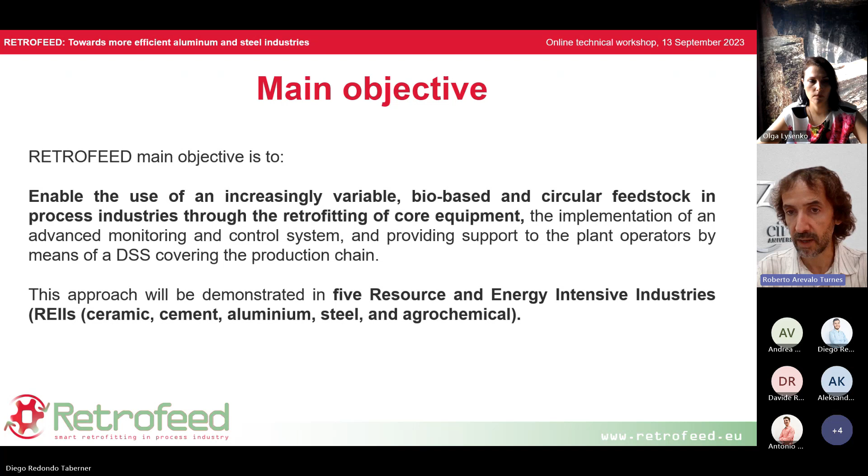The core equipment has been modeled by a digital twin in all cases, while the other processes, upwards and downwards, have been modeled by a variety of techniques, including machine learning.

These models, the digital twins and the machine learning models, are incorporated in the DSS, which also includes other tools to calculate, for example, KRIs, KPIs, production scheduling, prices forecasting, and other features. Together with the novel sensors, these tools will allow us to improve the control of the processes at hand.

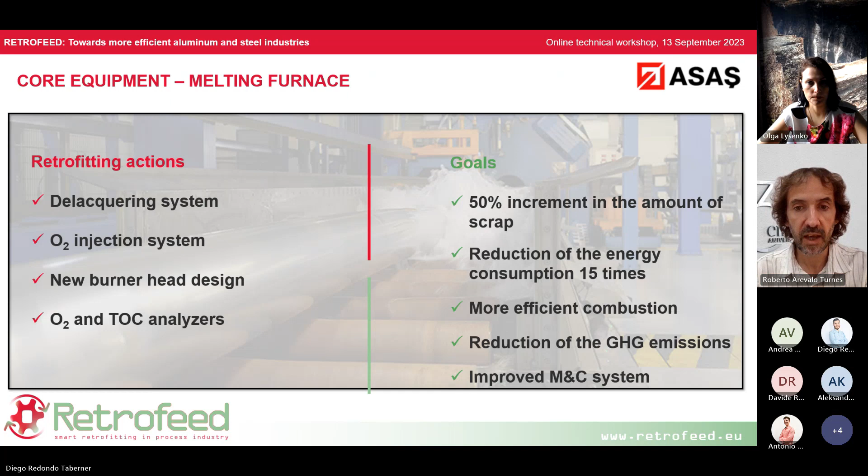Next one, please. In Feno, the retrofitting has been completed. The development of the models has also been completed. And now the tests with biochar are underway.

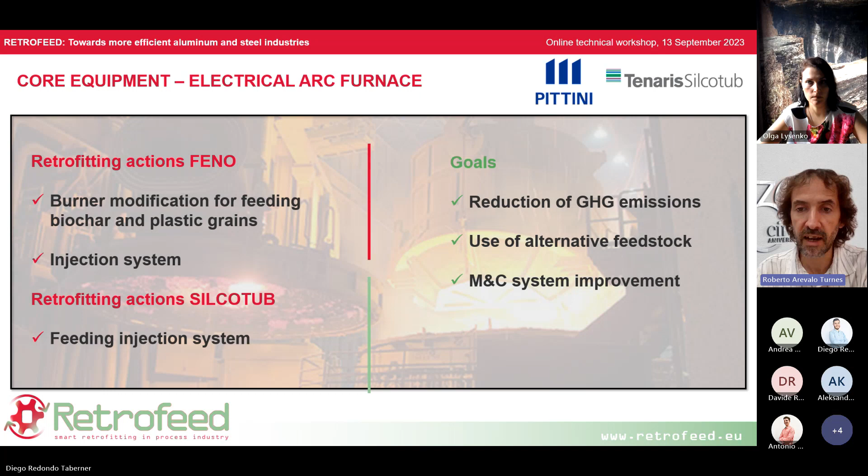Next one, please. In the case of Torrecid, this demo has also completed the retrofitting operations. The models have also been completed, and we already have preliminary results that indicate that we are achieving our goals in all the items, in energy and material saving, in optimization of fuel consumption thanks to the preheating of the air, and also in the reduction of material waste.

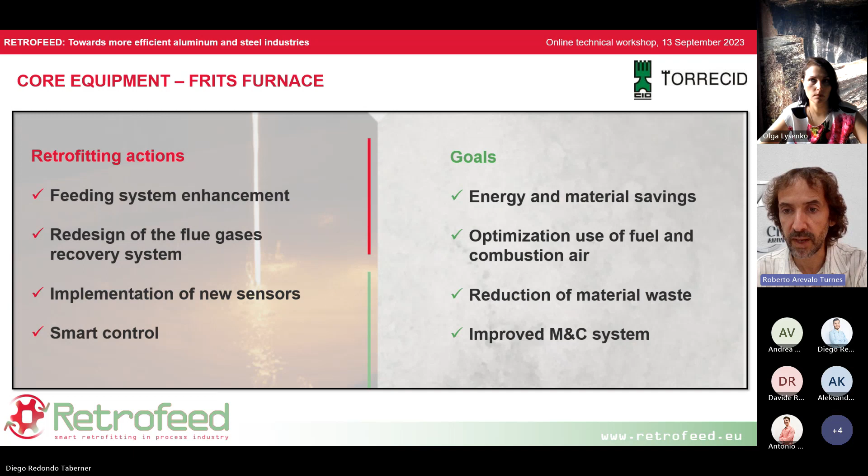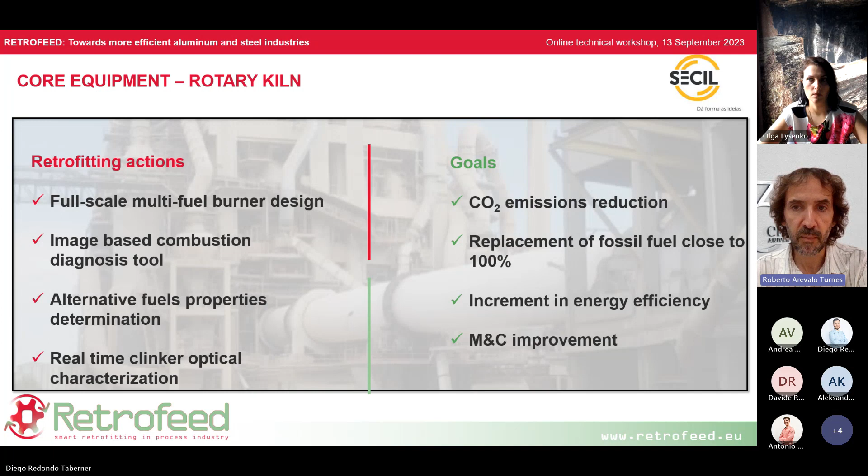In Secil, in the cement sector, retrofitting is currently underway. It will be completed this month, so soon the tests will start. We have completed the development of all the models and novel sensors, so this demo will soon also be completed. And finally, in the agrochemical sector in Fertiberia, a new reactor is going to be installed in the next months.

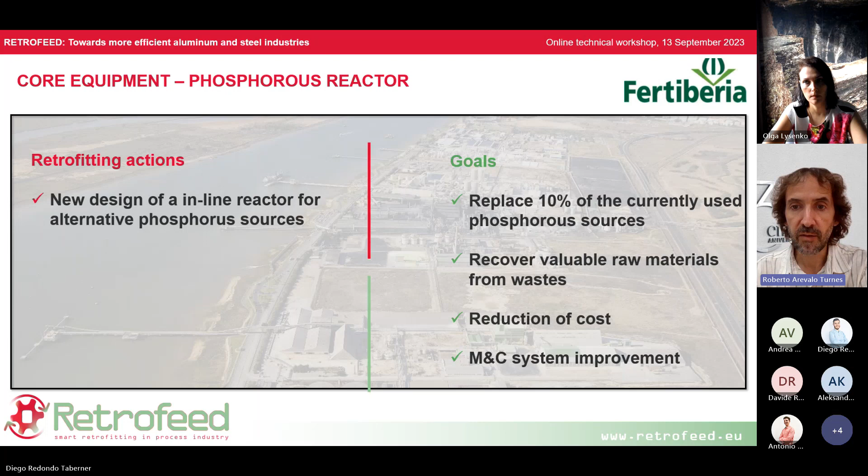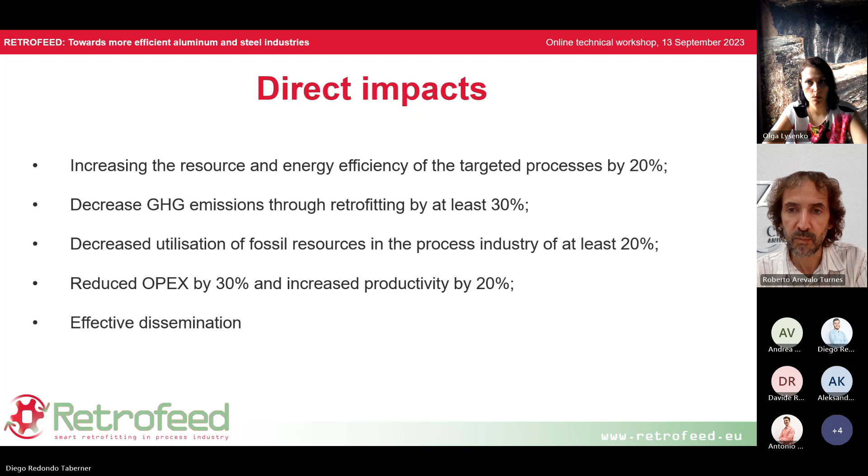And finally, a brief overview of our goals. As you can see, we have very ambitious goals in terms of energy efficiency, reduction of GHG emissions and use of fossil fuels, increase of productivity, and reduced OPEX. In the preliminary cases where we already have some results, we are glad to say we are achieving these goals. We hope the same is true for the demos completing retrofitting in the next months.

So thank you, and now I leave the presentation to the technical presentation.

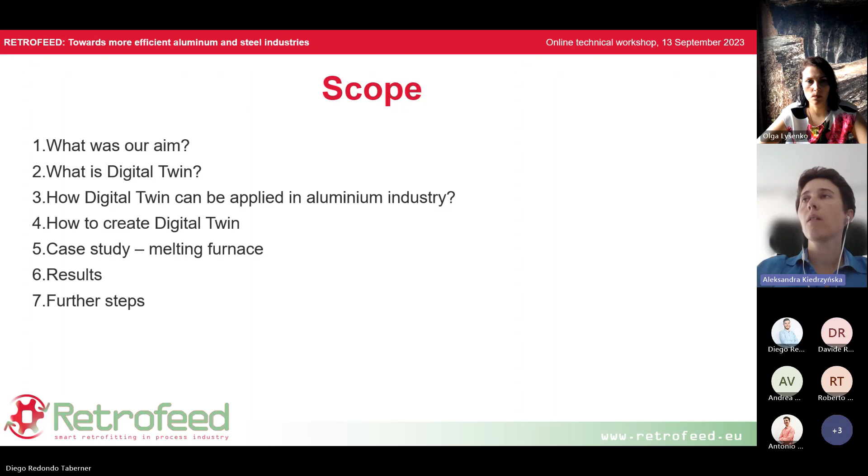The aim of this study is to develop a digital twin of core process equipment in the aluminium sector, characterize the behavior of this equipment, analyze possible retrofitting scenarios and modification of process conditions, and provide improved knowledge of the process.

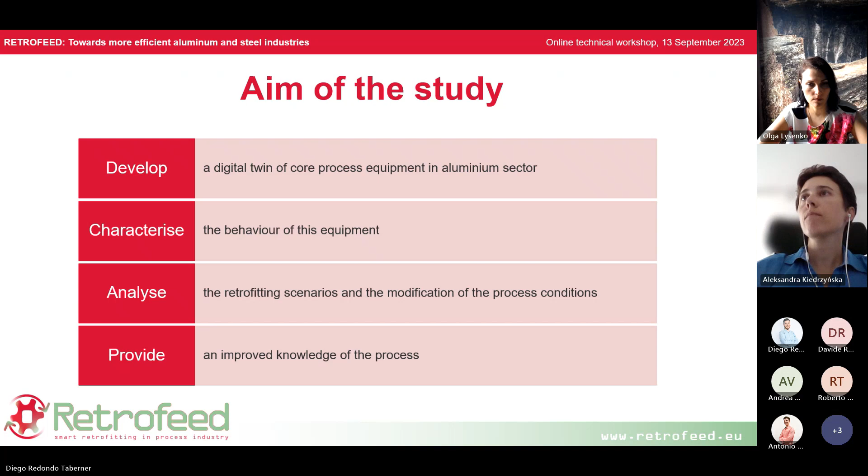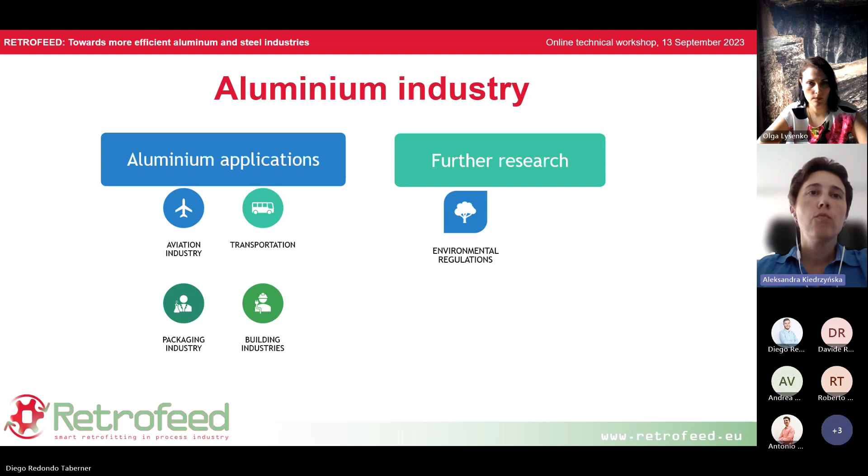The aluminium industry still faces two main environmental problems, which are energy consumption and pollutant emission. Of course, aluminium is widely used in fields such as aviation industry, transportation, packaging industry, and building industries. The global demand for aluminium is estimated to increase by 3 times by the year 2050.

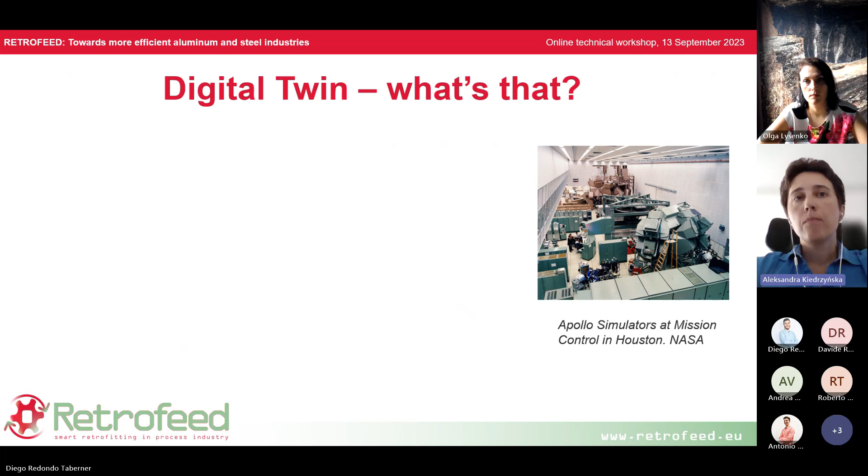The process of aluminium melting has been investigated for a long time. Different fuels, burners, and modifications were simulated and tested. However, further research is still needed to fulfill the requirements of environmental regulations, reduce non-renewable fuel consumption and pollutant emission, and improve energy efficiency. Aluminium melting emits almost 7 tons of CO2 per ton of product, which is the most energy-consuming part of aluminium processing.

Digital twin has its roots in aerospace engineering. The idea comes from the Apollo program, as it was the first place where the digital twin idea was put into practice. However, it was not called digital twin then.

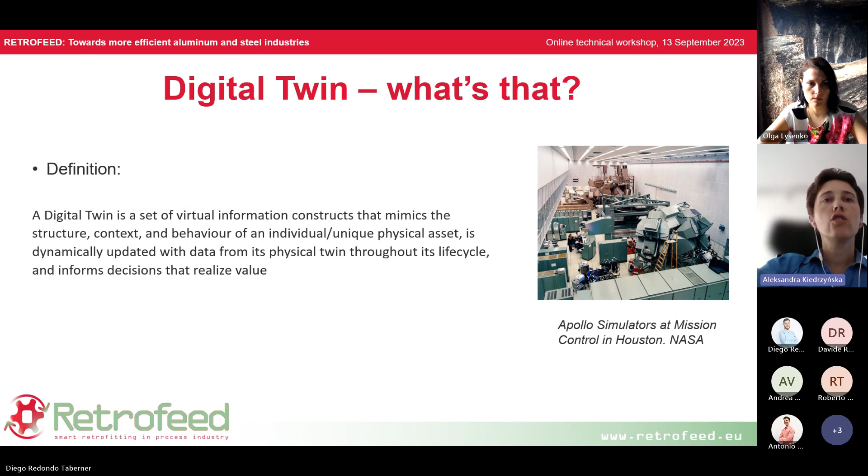According to the American Institute of Aeronautics and Astronautics, a digital twin is a set of virtual information constructs that mimic the structure, context, and behavior of the individual unique physical asset, is dynamically updated with data from the physical twin through its life cycle, and informs decisions that realize the value.

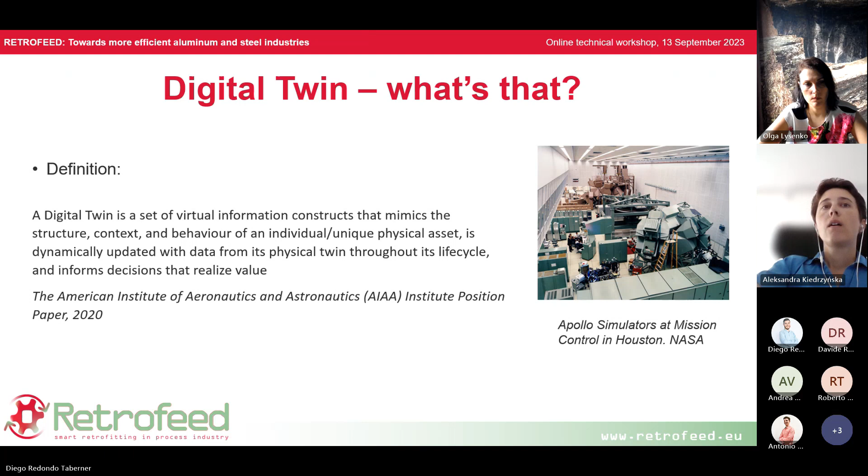Possible applications of digital twin are anticipating the response of the system, predicting system failure, and developing new technologies such as virtual prototyping. The aims in digital twin development of the aluminium melting furnace are better process understanding, prediction of furnace behavior at variable conditions, and optimizing furnace performance.

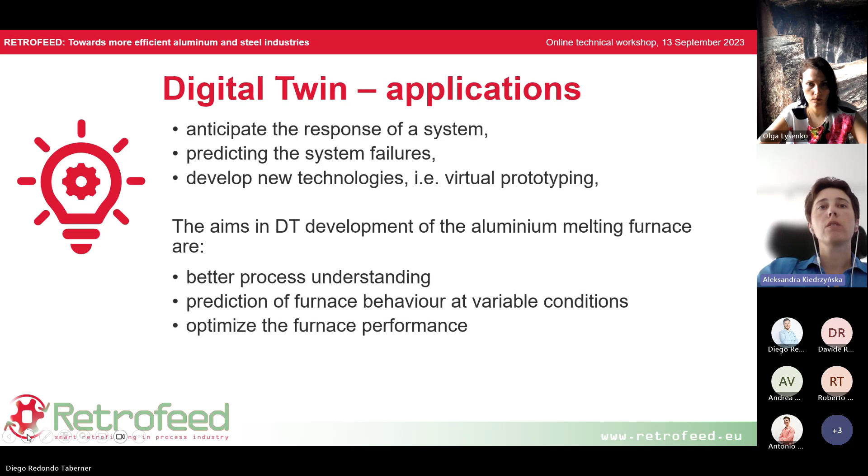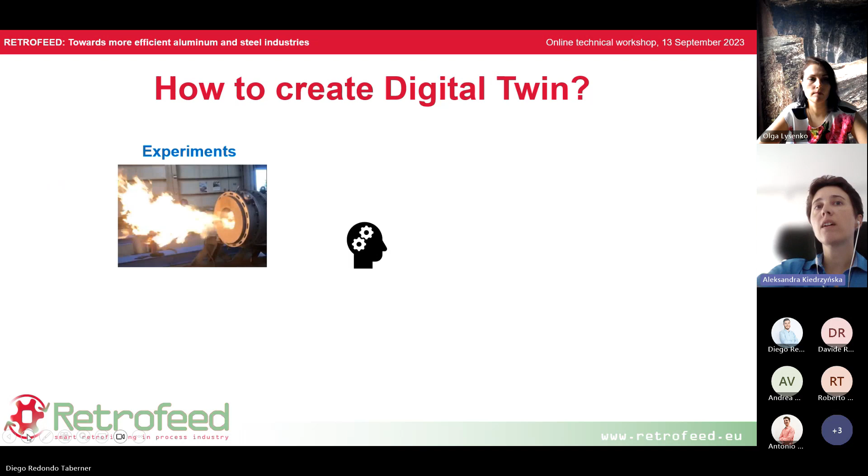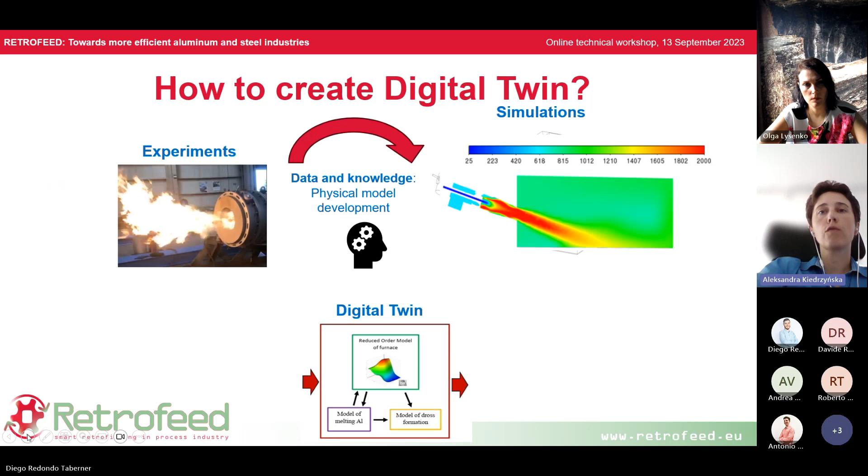To understand how the digital twin can be developed, it is necessary to understand the mathematical and computational foundation for digital twin, and what are the connections between experiments, simulations, and digital twin. From an existing object, we should get data which can be used for physical model development.

Then, based on simulation, we can extract features for machine learning and reduced order models. The digital twin must be validated based on experimental results, and limitations must be defined. The problem is when we are doing virtual prototyping and testing new solutions.

In our case, it was a new burner. Another problem can be when there is a lack of sensors which can be used for validation. In such cases, the digital twin can be based only on simulation and engineering experience of a similar system. This was the situation in our case.

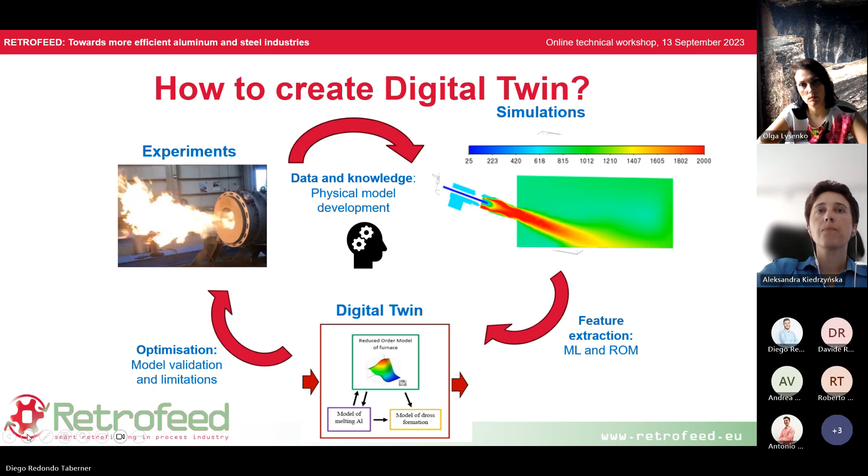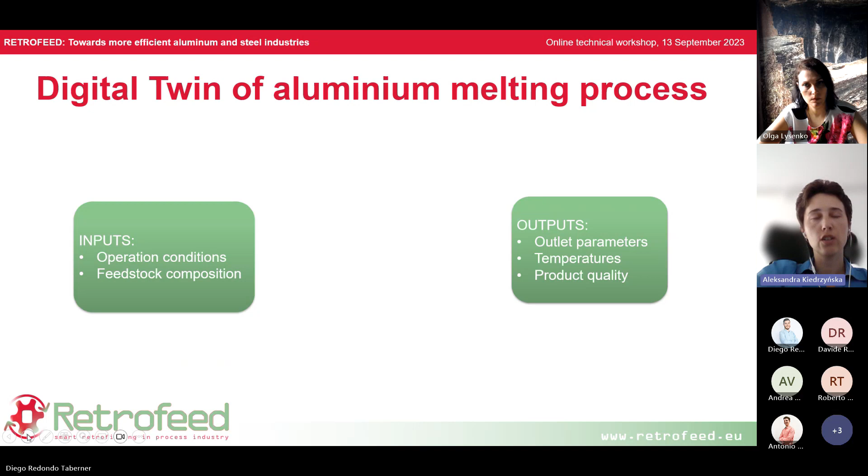In case of aluminium melting process, the inputs to digital twin are operating conditions such as power of fuel, temperature of air, air to fuel ratio, and oxygen flow, and parameters concerning the composition of feedstock loading to the furnace, such as total mass of aluminium sources, ratio of scraps, and ratio of contamination to scraps.

The outputs are the parameters such as temperature, species concentration, and emissions. Temperatures of refractory surface and product.

In our case, digital twin consists of 3 submodels: reduced order model of furnace, model of aluminium melting, and model of dross formation. Why did we have to split our digital twin into submodels?

The furnace is working in continuous mode, however, with changing operational parameters. But the melting process is a batch process. The feedstock is loaded to furnace and then discharged after melting. The full simulation of the whole process would be too computationally demanding. Now I'll shortly say a few words about those submodels.

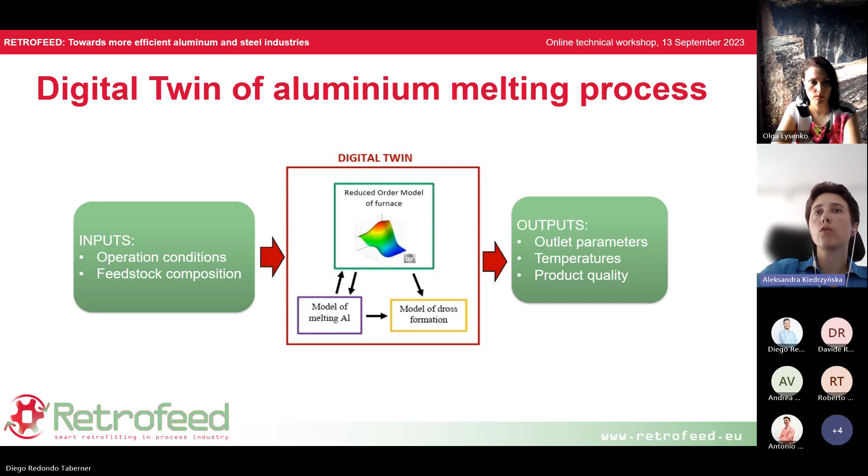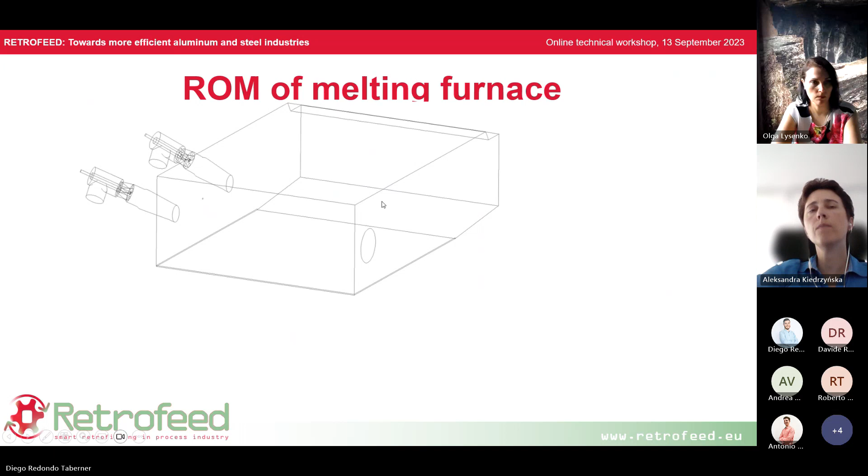To analyze the process of the aluminium melting furnace, the model was created of this aluminium furnace with 3 different burner heads. All the dimensions of the furnace and boundary conditions were in agreement with the real furnace.

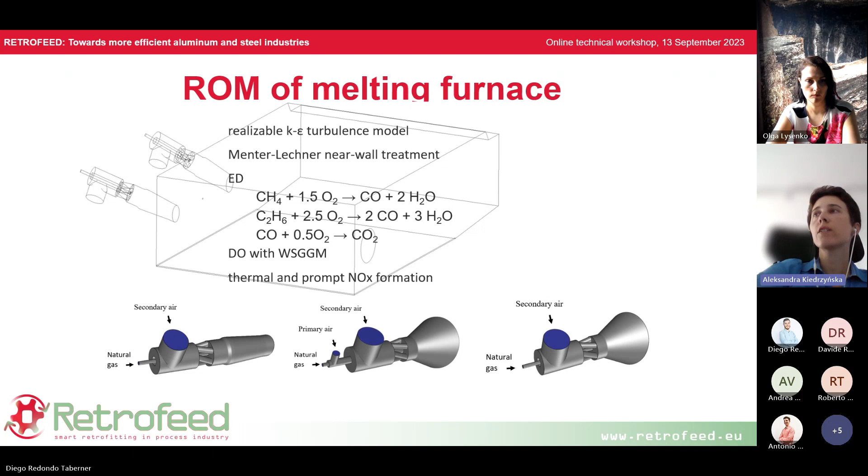The model was simulated, including detailed turbulent combustion with heat and mass transfer, including eddy dissipation, turbulent model, and radiative heat transfer, and 3 main reactions of combustion: methane, ethane, and CO were included.

The simulations were made in ANSYS Fluent software. Based on a series of simulations for different conditions with predefined range, the surface of response was created using ANSYS Twin Builder software. The ROM was created using genetic aggregation algorithm. The goodness of fit is presented next.

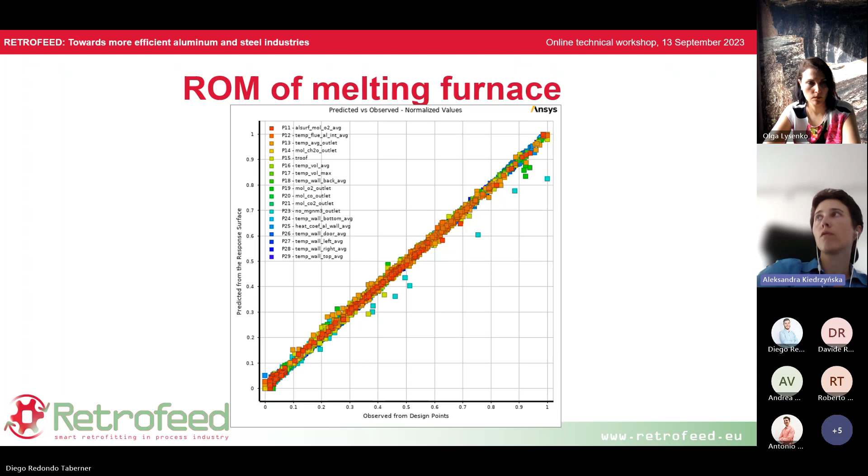It is presented as correlation of normalized values of observed and predicted output values.

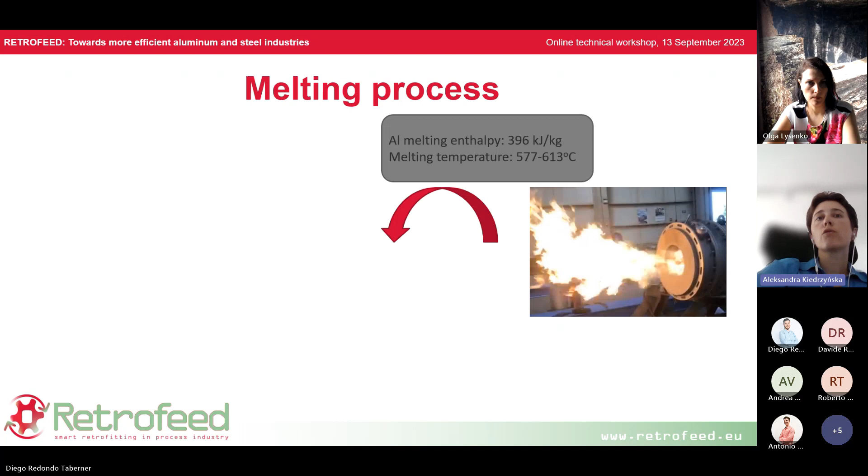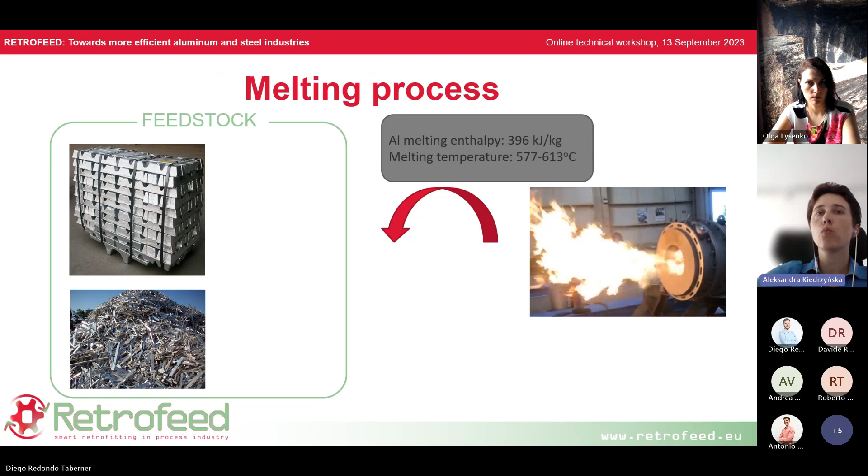Now a few words about the melting process. How the combustion process influences the melting process and vice versa. The combustion process, of course, needs to deliver heat necessary for aluminium melting. For one batch about 20 tons, we need about 20 gigajoules of energy. But how can the melting process influence the combustion process apart from being a negative heat source inside the furnace?

Aluminium feedstock consists of ingots and scraps. Ingots are quite clean aluminium, but scraps are recycled and can contain up to 5% contamination, such as paints or oil. When they are inserted into the furnace, those contaminations are intensively released as volatile organic compounds and are combusted in the furnace. This also increases dross formation.

The dross is a byproduct which decreases the product quality and efficiency. Melting process of aluminium involves the phase change of the aluminium. It was simulated using the enthalpy method, and a set of ordinary differential equations were included, also including the release of volatile organic compounds.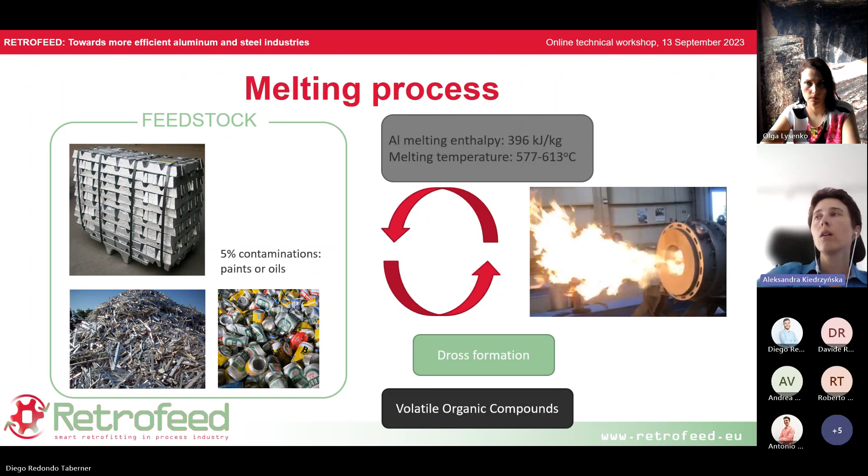Due to lack of any model of dross formation that can be applied for assessment of dross amount, it was necessary to carry out some experiments and develop a model based on that. We did these experiments in our laboratory scale macro TGA for different parameters of temperature, oxygen and scrap fraction.

Based on that, we obtained some empirical correlation which allows at least to estimate the quality of the product. The comparison between measured and calculated values is presented in the figure below.

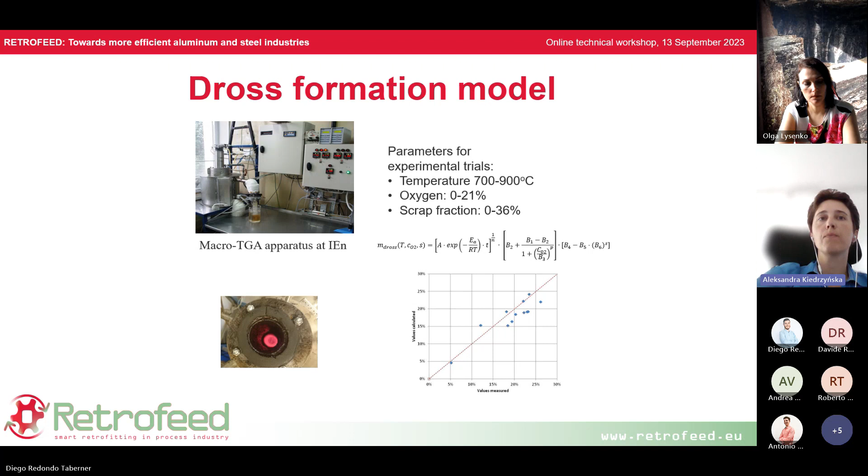This dross model was also implemented in Modelica and integrated into the digital twin.

However, the digital twin was validated only based on CFD results, because the installation of the new sensors at the furnace was finished with some delays. Such parameters as fuel flows are measured constantly, but for example, only total amount of air is known during a batch.

The results of some operational parameters must be assumed or estimated based on others. Here we can see the comparison between the measured value, the red line, and simulated, the green line. As we can see, the discrepancies are visible.

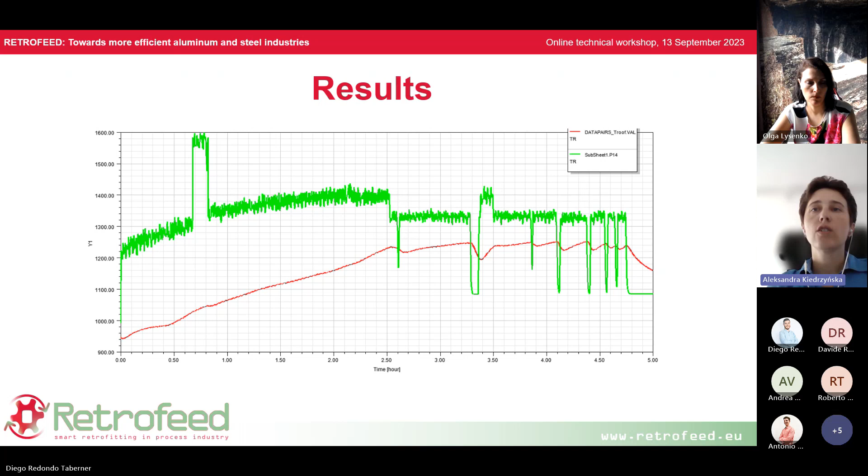However, the roof sensor, which is simulated here, is shielded and indicates temperature changes with a considerable time lag. We can also see here the step change of temperature caused by sudden release of volatile organic compounds and their combustion with added oxygen.

One application of the digital twin of the furnace was comparison of two burner heads. One was the primary burner head, and the second was a burner head designed by STEC. The results from the digital twin show what the advantages of the new design are.

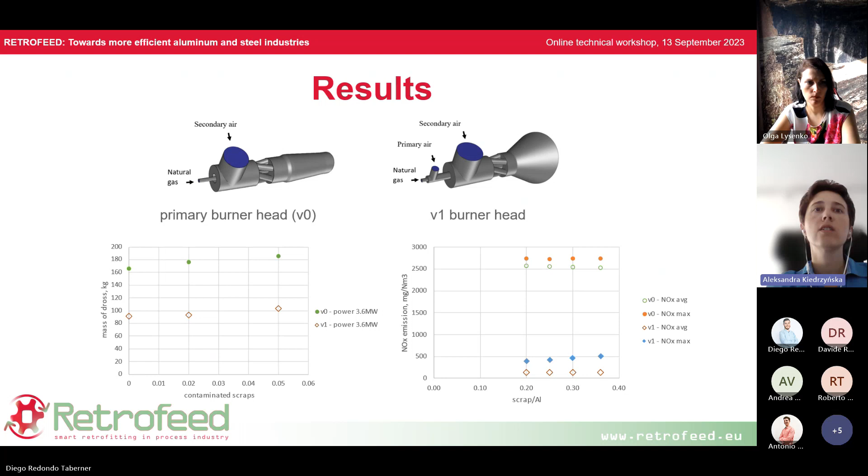For example, there is less dross formation, which results in better product quality.

Another advantage is the much lower NOx emission, even with higher scrap content. That new burner was already installed in the ASAS furnace, and preliminary results show less natural gas consumption and lower NOx emission than the previous burner, which is in good agreement with our results.

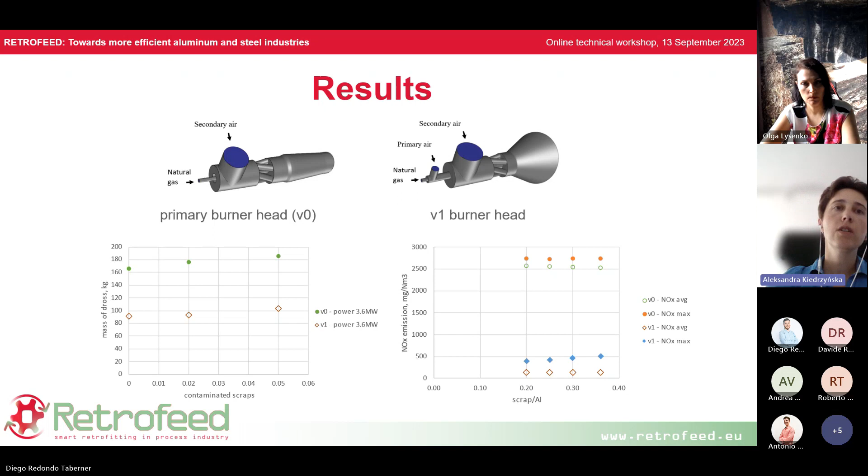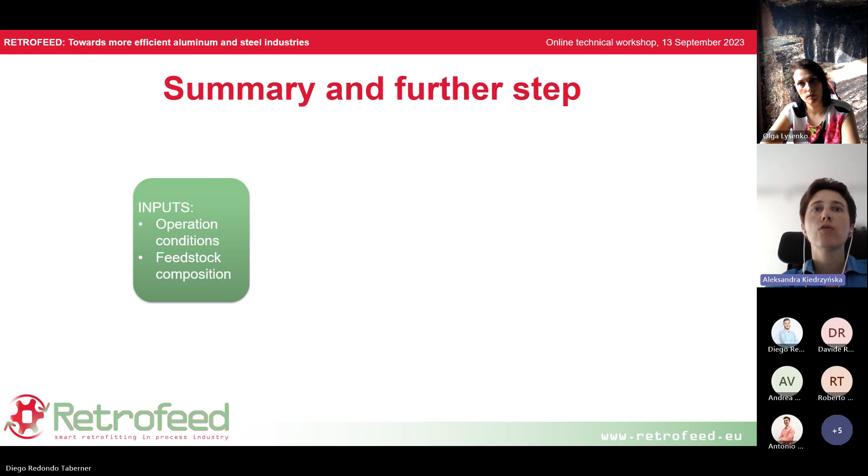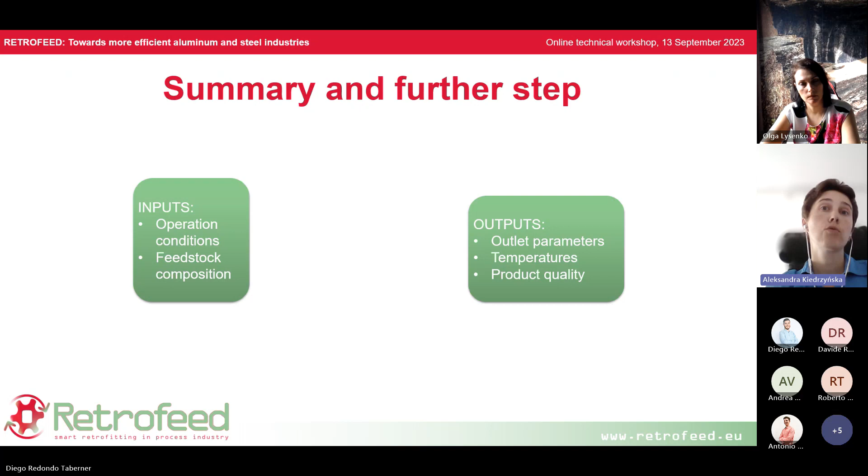The aim of this work was to develop a digital twin of the melting process. It allows for quick prediction of how selected operating conditions and feedstock composition result in outlet parameters, temperature, and product quality. Those simulations are unsteady and very fast.

In our case, the digital twin consists of three submodels: a reduced order model of the furnace developed based on a series of CFD simulations. This reduced order model was integrated with the model of melting process and dross formation. All submodels exchange necessary data between them.

Together with sensor data from industrial plants, it will be included into the decision support system for plant operation, and it will help them assess the potential effects of different retrofit options and optimize the production process. Thank you for your attention.

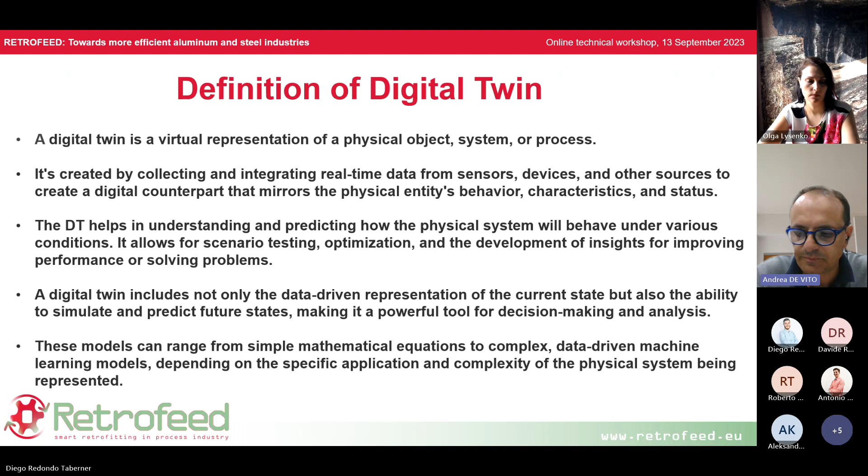Next slide, please, Diego. Thank you. So, what are the main objectives of the steel industry in the RETROFEED project? The main objectives in the steel sector are to partially replace the fossil fuel input material, basically coal and natural gas, in the electric steelmaking production cycle with biochar derived from biomass and plastic grain.

Also, another objective in the RETROFEED project is to replace coal, lime, and scrap with steel industry residues, coming from the steel industry itself, and with similar residues coming from other industrial sectors. For example, granulated tire. Next slide, please. Thank you.

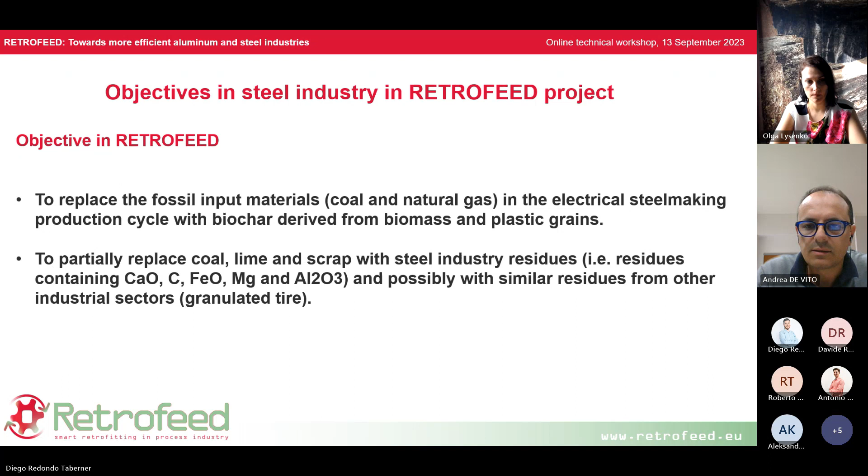So, with this objective, a digital twin of the electric arc furnace, the EAF plant, has been developed in this project. The digital twin will include physical models to reproduce the behavior of the EAF scrap melting process, with respect to the new burner, focusing on the main process parameters like melting rate, methane addition, and energy consumption.

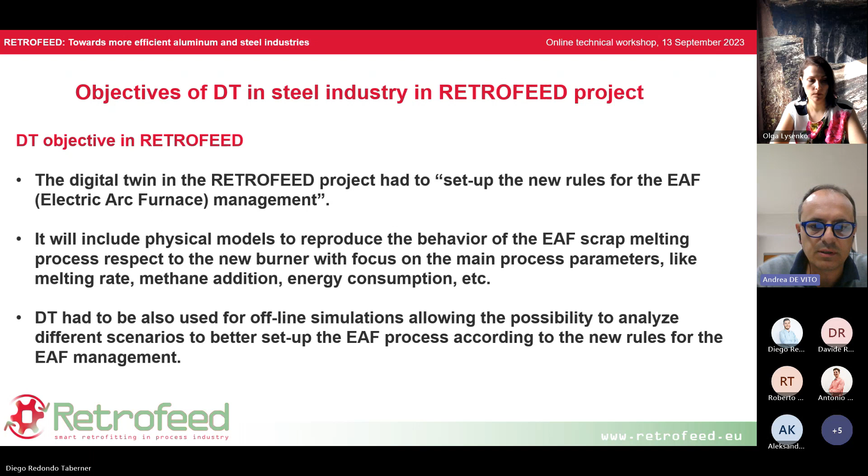The digital twin has also been used for offline simulation, allowing analysis of different scenarios to better set up the EAF process according to the new rules for EAF management. The new rules are basically related to the introduction of the newly developed injector or burner. Okay, thank you.

So, how is the digital twin of the EAF made? The DT of the EAF is basically an application that represents the melting process of the EAF plant, by taking into account the energy and mass balance of the plant.

In the slide, the mass balance scheme of the model is shown on the left, with the contribution of all input and output material flows. It's possible to see the scheme of the mass balance with material and gas input from the different sources, and the steel and slag as the main output material.

On the right side, we can see the scheme of the energy balance model, which takes into account the main input energy of the system, basically the chemical and the electrical energy input.

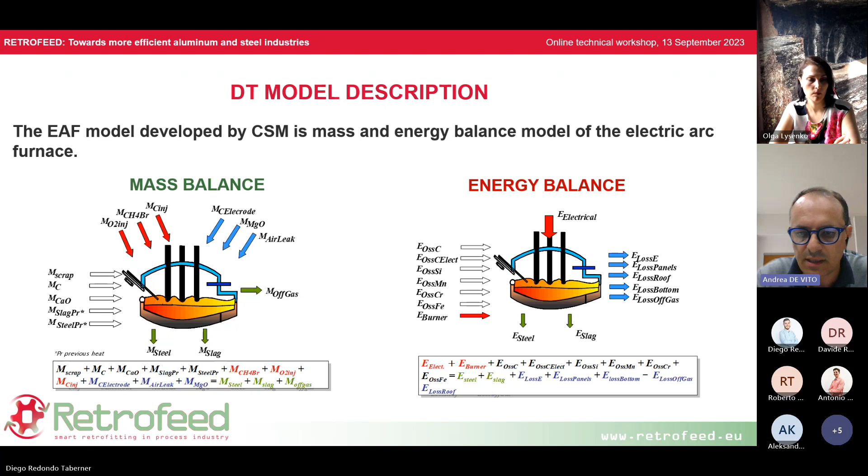To represent in the EAF digital twin the possibility to evaluate the introduction of new plastic material, we have inserted the possibility to simulate its introduction and contribution in our mass and energy balance. Starting from the proximate analysis, it's possible for each new material added to break down the type of plastic. In the model, the contribution of each plastic product, mainly volatile fraction, fixed carbon, and ashes, has been represented in the schema in this slide. The moisture and flue gas end in the freeboard, the ashes increase the slag mass and energy, and the fixed carbon ends totally in the steel bath as mass and energy contribution.

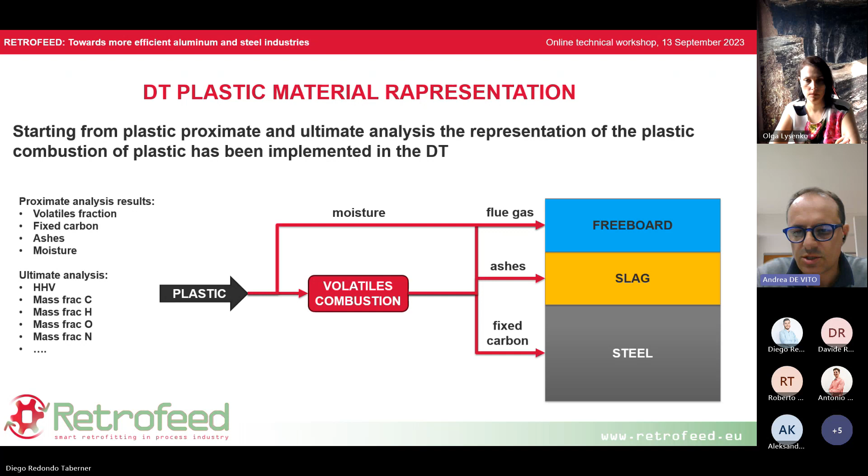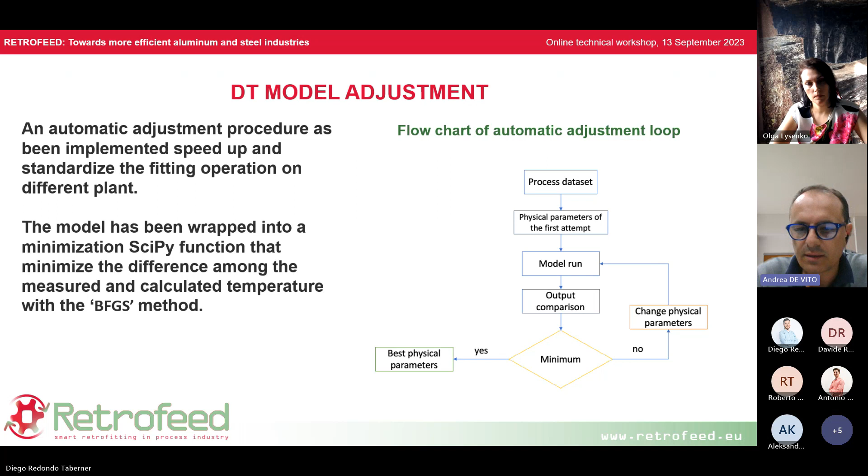To automatize, speed up, and standardize the adjustment procedures, a new routine has been developed. The model has been wrapped into a minimization SciPy function that minimizes the difference between the measured temperatures coming from the plant and the temperature predicted by the model, by changing iteratively the physical exchange parameters used as tuning parameters.

In that slide, we can see the graph showing the process of the automatic adjusting process. Starting from the first tentative coefficient, the automatic routine will decrease step over step the difference between the measured temperatures and the calculated ones.

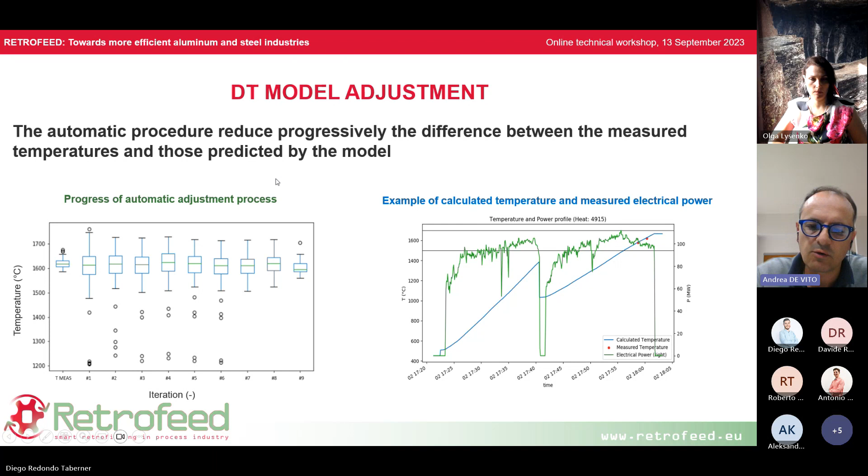On the right graph, it's possible to see the results of the adjustment shown for a typical heat, where we can see the main input of the model, the electrical power, the green line, and the main output of the model, the average bath temperature, that is the average temperature of the steel within the furnace. It's possible to see that the predicted value of the model, the blue line, fits well with the measured temperature, the red points, and also the trend of the curve.

We have also used the digital twin in our natural utilization, to explore a new scenario. The biggest advantage of the digital twin is that we can use it to explore new scenarios in which raw materials are substituted for the supply of energy and substances, to improve the efficiency of the process and at the same time reduce the global environmental impact. With the aim of evaluating the impact of the use of plastic in substitution of methane inside the electric arc furnace, we simulated a new operative scenario.

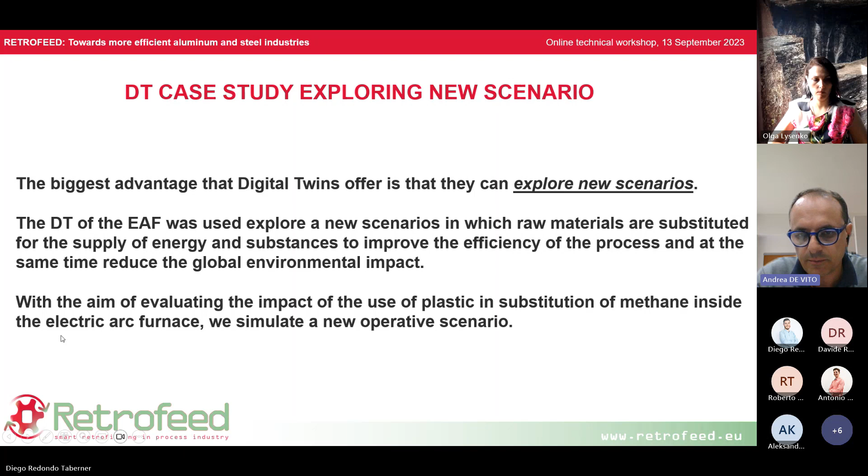Starting from real operative conditions coming from the plant data, the simulations were carried out by progressively converting one burner at a time to replace the methane with plastic, having as a target of the simulation the final temperature.

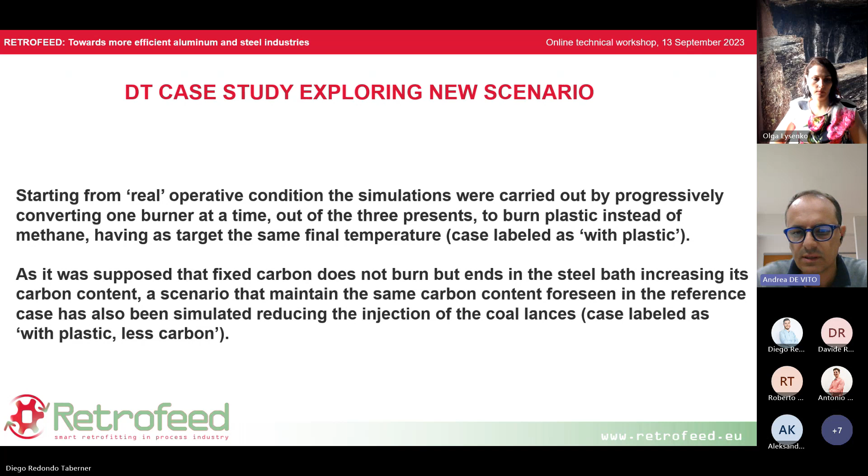As using plastic, the fixed carbon in the bath will increase. We also made a study of another scenario with the objective of having the same carbon content in the steel bath, reducing progressively the injection of coal lances, having in that new case as a target not only the same tapping temperature, but also the same carbon content in the bath at the end of the heat.

In that slide, we have represented the main differences in the inputs used in these two simulated cases. On the left graph, we see the variation in methane flow rate injection: using plastic, we can reduce the injection of methane to reach the same tapped steel temperature, because of the contribution of the plastic to the total heat insertion in the furnace. On the right graph, it's possible to see the reduction in carbon injection needed to reach the same carbon content in the steel bath, so we can also reduce the carbon content.

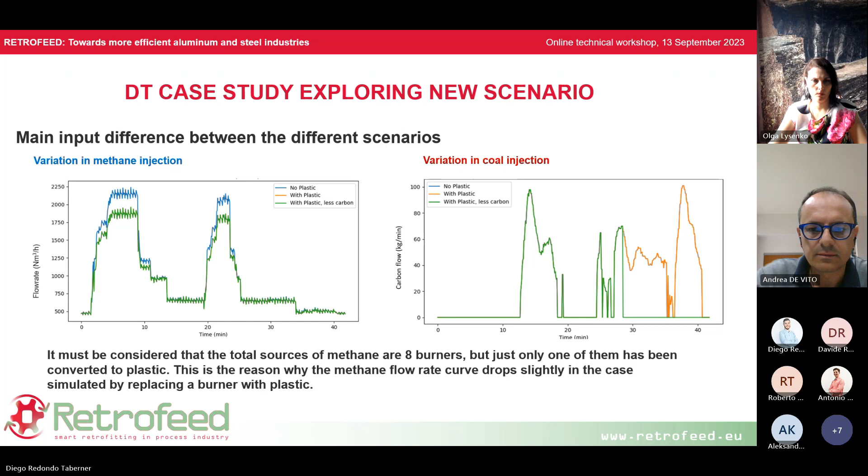Okay, in this slide we can see the main results of these two new scenarios simulated. It is possible to see that after converting only one burner from natural gas to plastic material, the carbon content in the steel bath is almost doubled. This is possible to see in the central bar graph.

So to reach the composition of the no-plastic case, the total carbon was almost halved. On the other side, the furnace with the plastic and less carbon showed a saving of about 48 normal cubic meters of methane and 600 kilograms of coal.

However, due to the complexity of the process and the variability of the operating conditions that we have in the electric arc furnace process, this simulation does not extend to performing tests on the real plant.

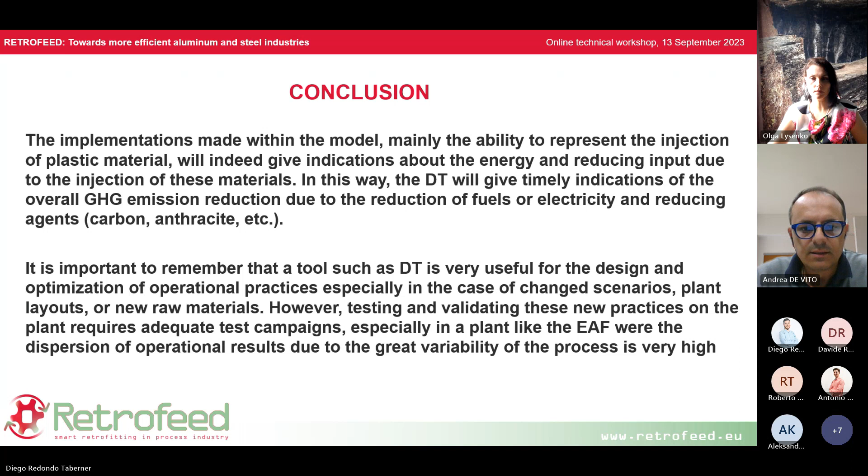Okay, thank you for the attention.

Thank you, Andrea, very much. That's all for my side. Thank you for your interesting, exciting presentation.

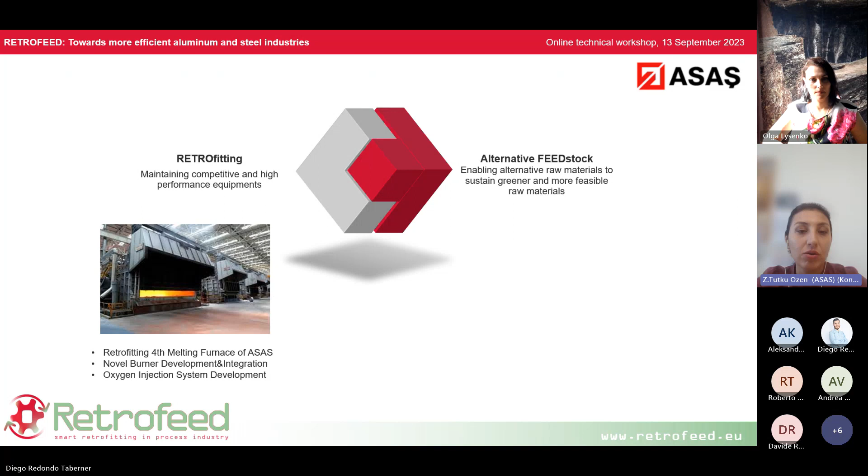Also, we have integrated some new feedstock, which are painted and lacquered scraps. In the aluminum industry, normally we are not able to use this kind of scrap because they cause a lot of greenhouse gas emissions, so these are not allowed to be melted in the melting furnaces. In order to be able to use post-consumer scraps, we need to pre-process them with the delacquering system to create new feedstock for our furnaces.

We have, in this retrofit project, integrated the delacquering system. We may proceed.

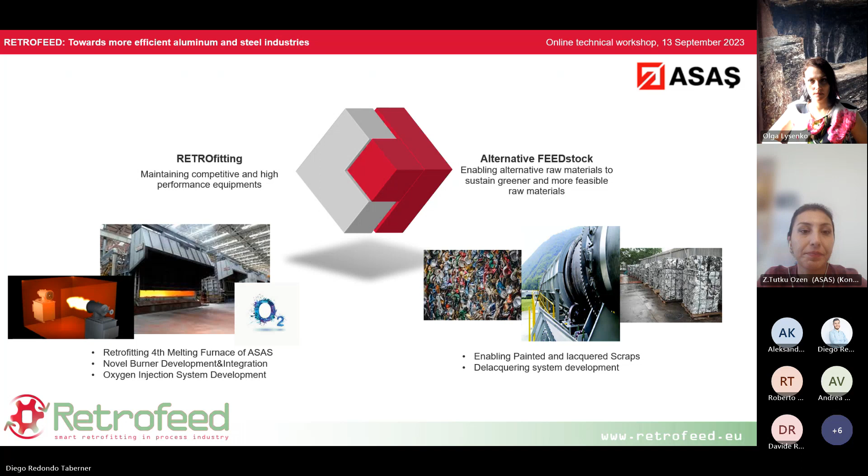In order to carry out these activities, first of all, we have carried out retrofitting actions. IEN has done some CFD analysis about burner heads and oxygen injection systems, and Sistem Teknik, which is another machine developer company in Turkey, has designed and developed new burners and a new oxygen injection system, integrated into ASAŞ's existing fourth melting furnace.

Also, a delacquering drum system has been developed within the scope of this project in order to sustain alternative feedstocks, and it has been integrated. We may proceed.

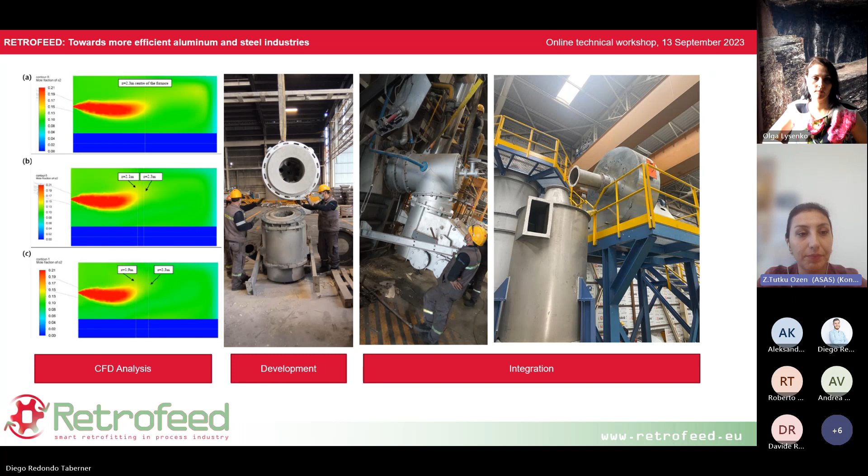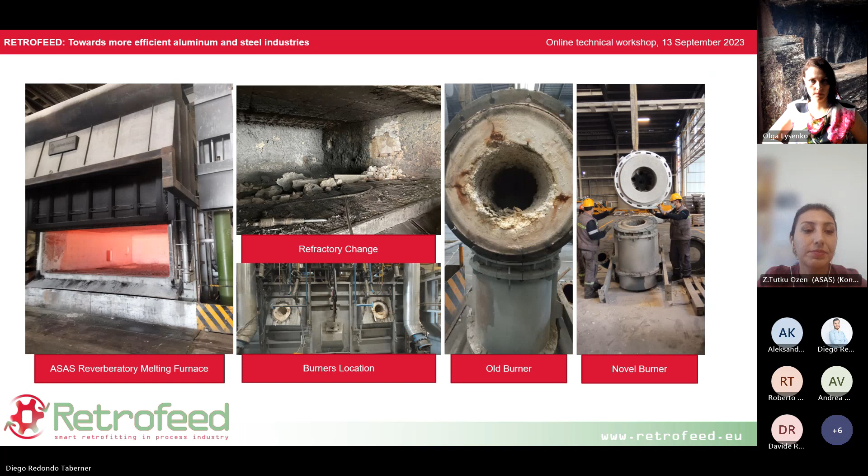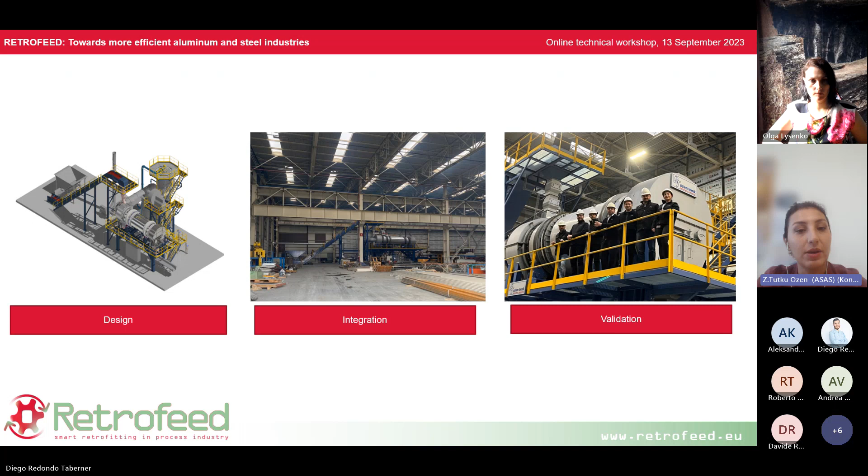Also, with our project partner Sistem Teknik, they have designed a new delacquering system, and it has been integrated into the ASAS facilities. Our route was followed by the validation of this delacquering system and the new burners with the new alternative feedstock. We may proceed.

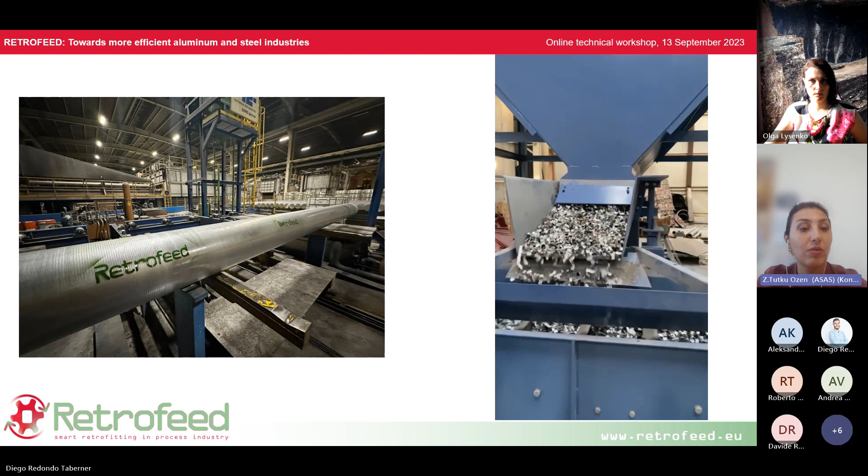As you can see, we have produced aluminum billet, which is the output material of the melting and casting processes, which are the target of this project. On the left side we have a video. Maybe, Diego, we can try to run it.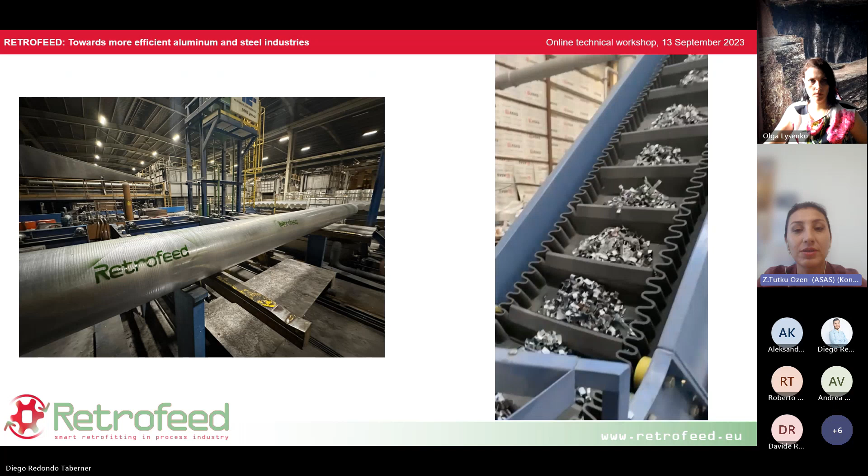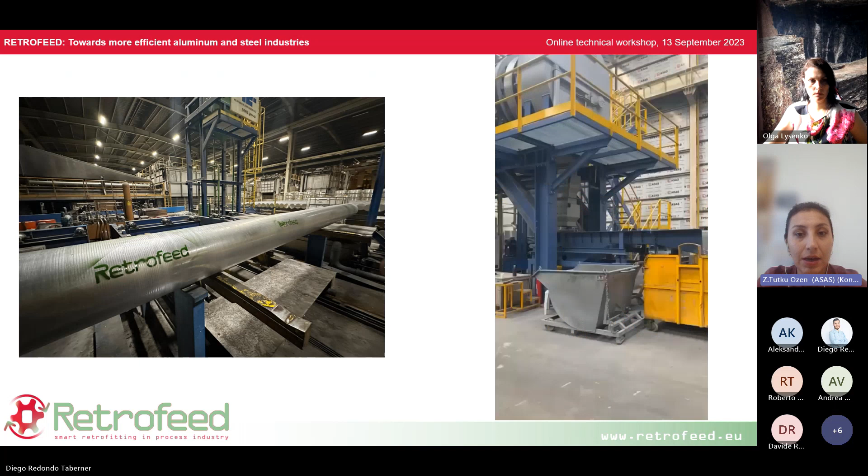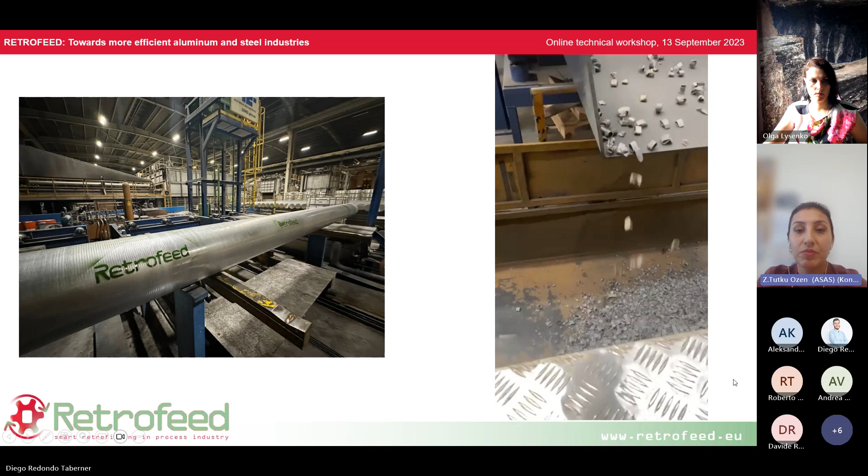As you see in the delacquering system, first of all, shredded, painted and lacquered scraps enter from the bunker to the system, and are transferred to the delacquering rotary kiln from the conveyor. The rotary kiln rotates at a constant speed and constant temperature to carry out the delacquering process, which is decoating of these scraps. The decoated scraps are tried at lab scale first, and then tried at industrial scale production.

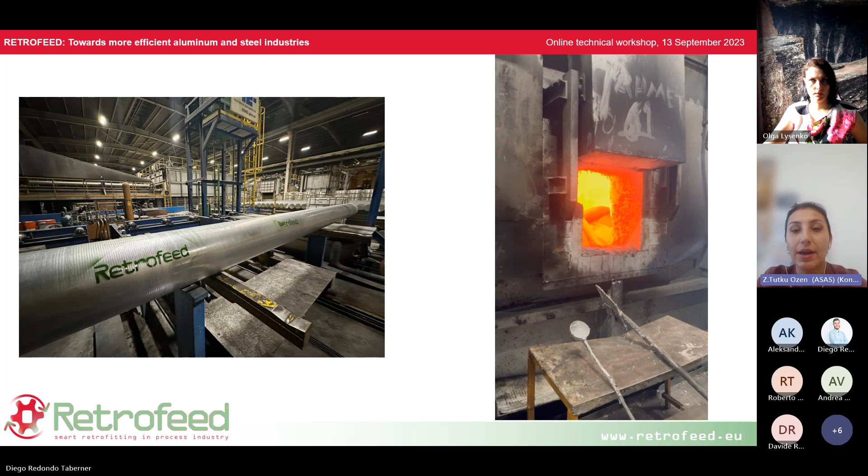Here you are seeing a melting furnace of ASAS, in which we have carried out our process trials. You see our extrusion billets here and our slags after the project. We may proceed.

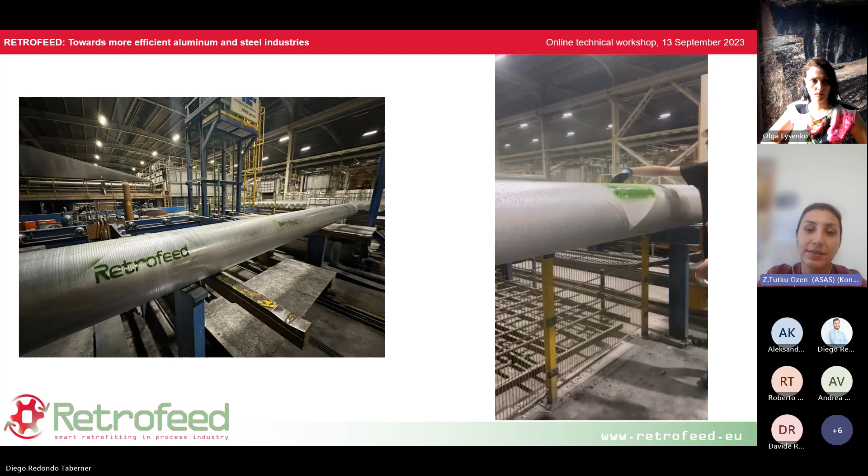As Roberto has mentioned in his part of this presentation, these were the goals and the results of our project. You can see resource efficiency, energy efficiency, greenhouse gas emission results, and fossil resource usage results. As stated in Alexandra's presentation, the low NOx results caused greenhouse gas emissions to be lowered. It has been enhanced by 75% in carbon dioxide emission.

Also, for fossil resource usage, we targeted to decrease it by 30%, but in this project we achieved 19% lower natural gas usage, as Alexandra mentioned in her part of the presentation. Besides, we have supplied more resource efficiency than the goal. We sustained 57% resource efficiency and 18.5% energy efficiency.

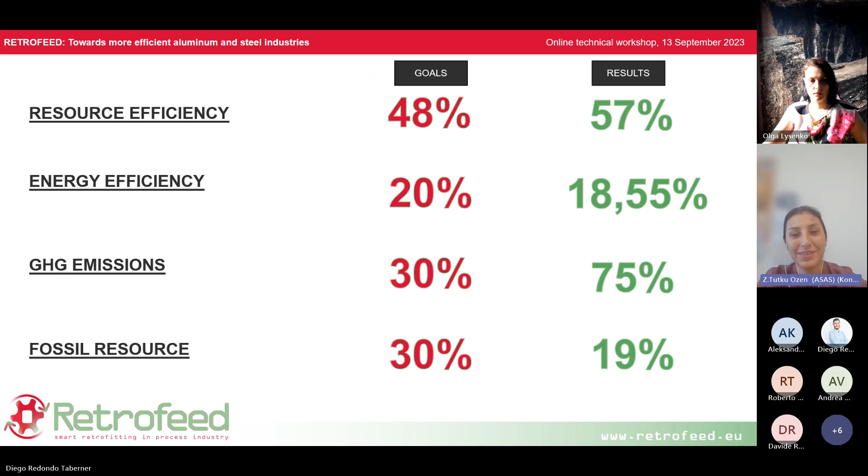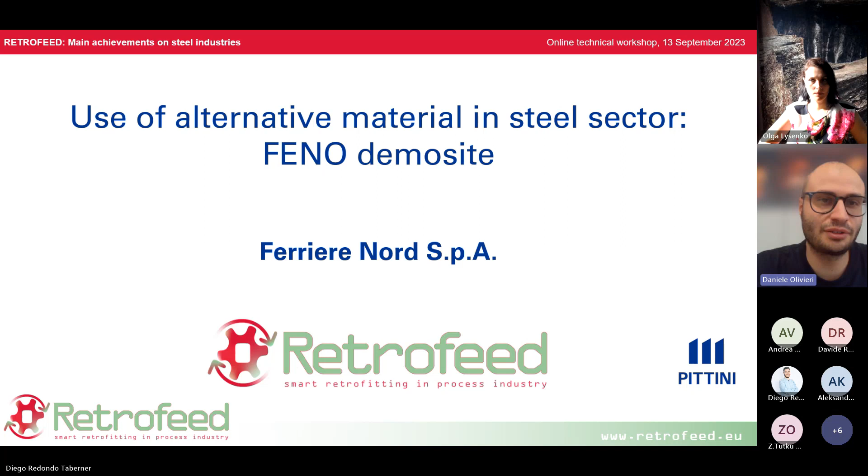We can proceed with the steel part. Hi, good morning. Now I'm going to present our demo site, which is a steel plant. So I think we can proceed.

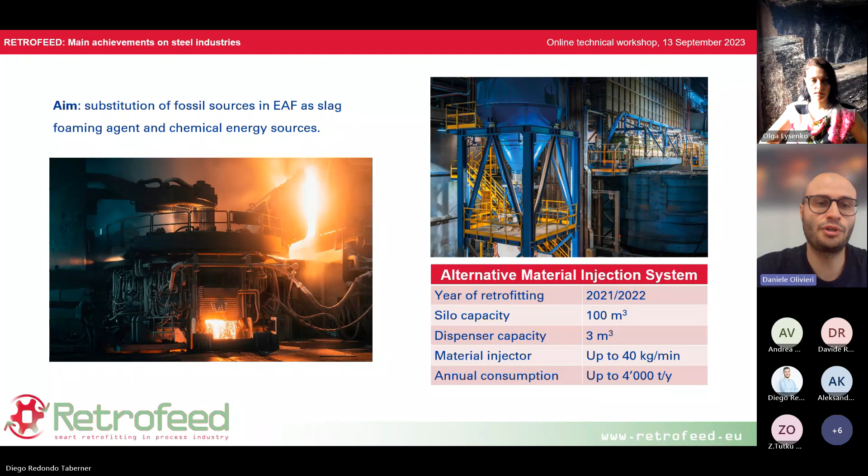And we have an average annual consumption of up to 4,000 tons of material per year, and it depends, of course, on the material we are using. We can go on.

Now, this is the material we use in this project. We tried it both as a replacement for burner fuel, but also as a foaming agent. These are the main materials we tried. We tried polymers as the first attempt, and the most important thing is that every material has almost a certain percentage of biogenic carbon content. So with polymers, we tried to replace, for example, natural gas as burner fuel.

Then we had a large number of trials with tire grains as injection material in our furnace, and we injected a lot of this material, around 2,000 tons. For example, we had around 6,000 heats where we injected this material in order to replace anthracite to create a proper foaming slag. Another experimental approach we had was to try a sort of blended polymers with limestone that should create a sort of foaming slag inside our furnace. We tried several tons of this material, and it had around 25% biogenic content.

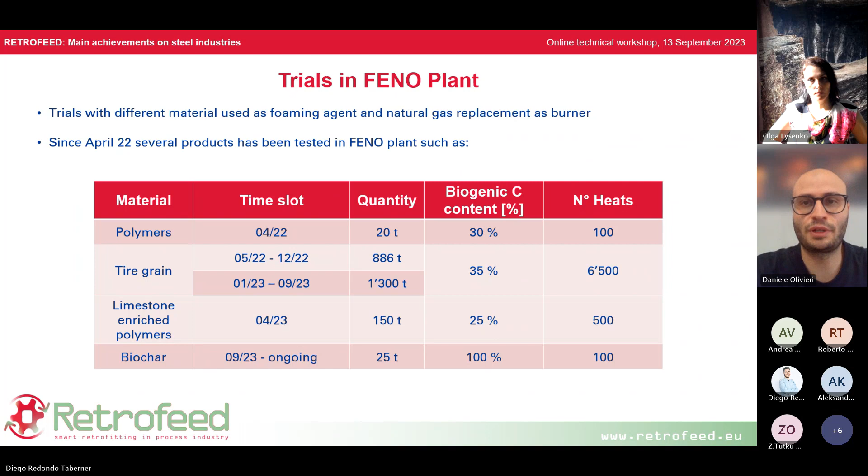Now I'm going to show the results of the tire grains, because we had a lot of trials with this material. So we have some results which are statistically valid. We had large trials both in 2022 and 2023, and in this table I made a comparison between injection and no injection.

The main aspect that we can see is that in 2022 we have a higher substitution rate, and in 2023 we had a lower one, which means we are heading toward the reduction of substitution rate. We are planning to go through one, which is our aim, because we are knowing more about this material and trying to inject it in a better way.

Another aspect is that even if we are using or not the tire grain, we are still reducing the anthracite consumption, because it gives us better knowledge of when to use anthracite in our process. This is another important aspect. I think we can proceed.

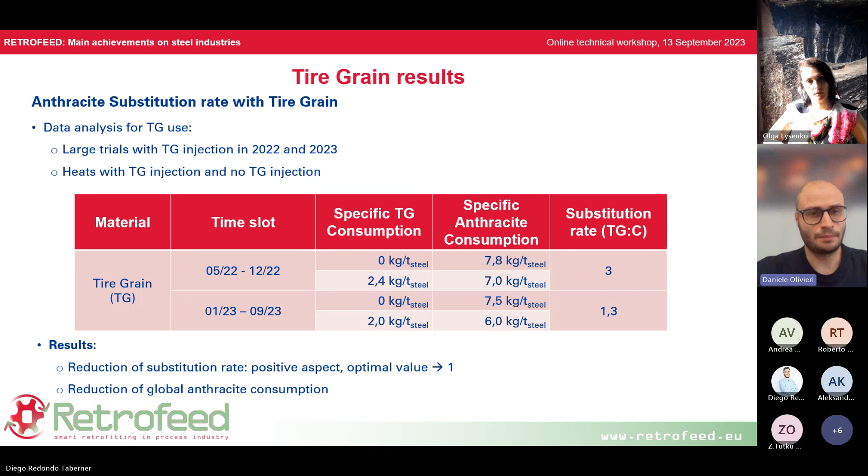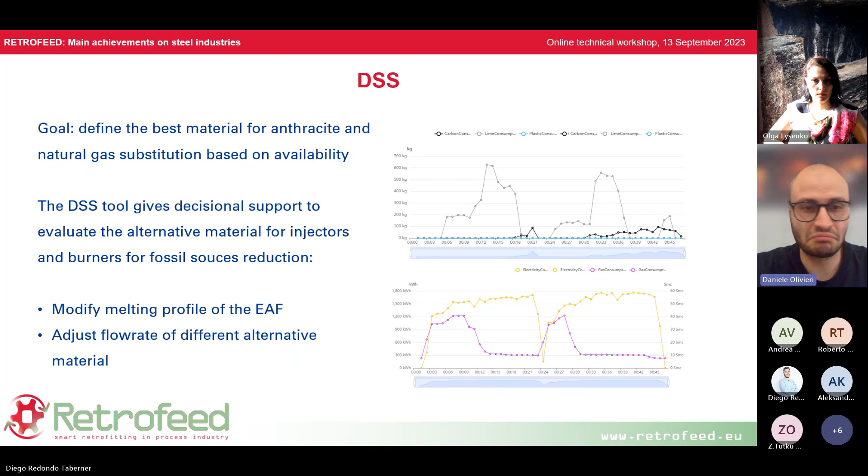And of course, also the timing of when to inject this material. It is also able to give some advantages in order to modify our melting profile in our electric arc furnace plant. So I think that's all from my side, and thanks.